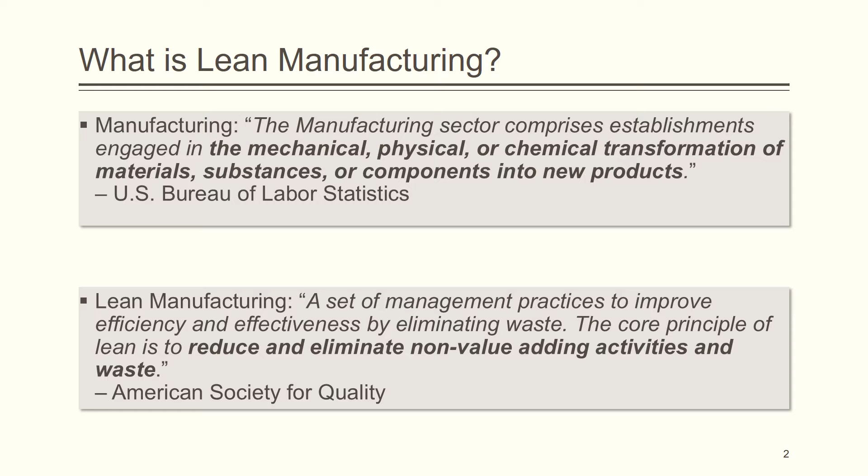You may sometimes hear lean manufacturing referred to as lean production, lean thinking, or lean management. They all describe a philosophy that emphasizes adding value to the customer and a commitment to continuous process improvement. Lean manufacturing is based on 5 core principles: value, the value stream, flow, pull, and perfection.

The first principle of lean is the identification of value. Value is determined from the perspective of the customer and includes how a product can meet a customer's needs, as well as the price and delivery time.

Next, the second principle is to identify the value stream. Value stream mapping is a process of visually documenting all of the activities involved in the production process which add value for the customer. Some processes do not directly add value, but are nonetheless necessary to support the value-adding activities and to run the business. Activities that are both non-value adding and unnecessary are considered waste and should be eliminated.

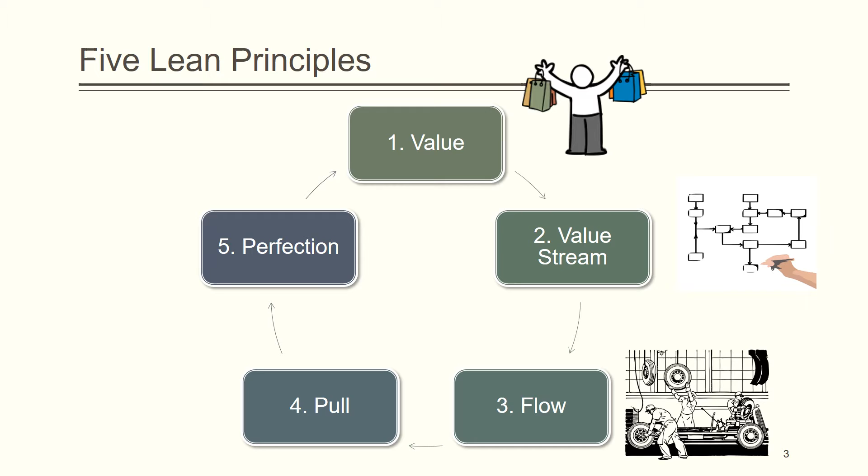Third, lean manufacturing emphasizes the uninterrupted flow of value-adding activities from raw materials to the end user. Improving flow involves connecting materials, processes, machines, employees, and information in a seamless and uninterrupted manner. Fourth, pull refers to relying upon customer demand to direct the quantity of units produced. Using a pull system involves minimizing the stock of raw materials, work in progress, and final inventory on hand.

Finally, lean manufacturing is focused on striving towards perfection through a process of continuous improvement. You may hear this referred to by the Japanese term kaizen.

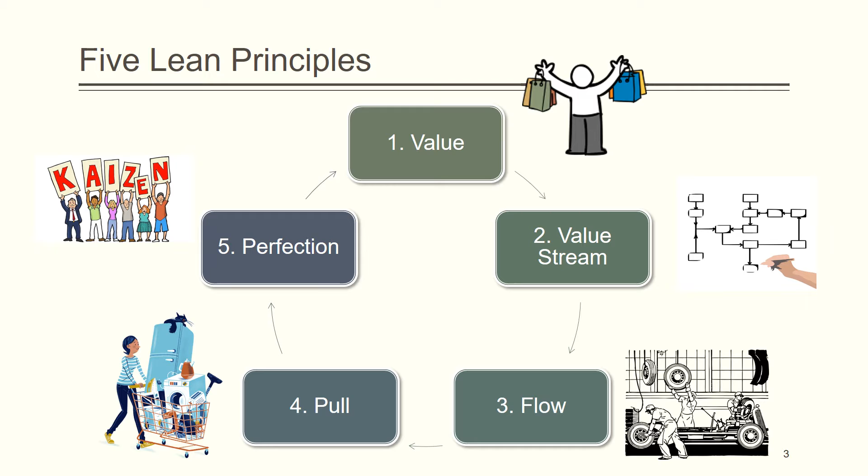Fundamental to the philosophy of lean manufacturing is the reduction of waste. Waste can be divided into 8 categories: product defects, overproduction, time spent waiting unproductively, non-utilized or underutilized talent, transportation of goods from one location to another, excess inventory, unnecessary motion of people, machines, and items, and extra processing steps, which are non-value adding. All of these types of waste add costs but do not add value, and therefore should be eliminated.

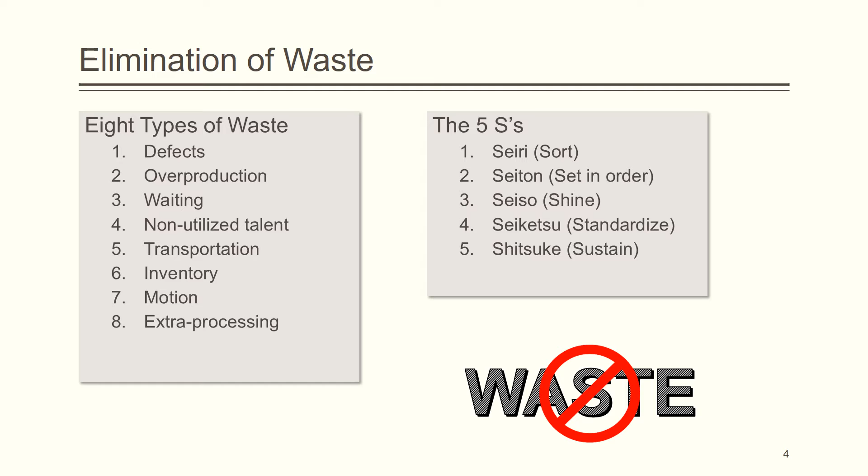One of the several tools in the lean practitioner's toolkit is the 5S system, which can help to reduce waste. The 5 S's are sort, which involves removing unnecessary items and clutter; set in order, or make sure all necessary items have a designated place; shine, or make sure the workspace is clean; standardize the process by regularly sorting, setting in order, and shining the workspace; and finally, sustaining and reinforcing these best practices by making the 5 S's a habit.

The most famous example of lean manufacturing is the Toyota production system. Toyota's goal is to achieve the best quality, lowest cost, shortest lead time, best safety, and highest employee morale by eliminating waste. The system is based on 2 principles: Jidoka and just-in-time.

Jidoka seeks to build quality into the product through several principles and processes, such as separating the human from the machine, preventing errors, and the andon system, which involves workers being able to stop the assembly line if they detect a problem. This ensures that defects do not propagate through the manufacturing process to the customer.

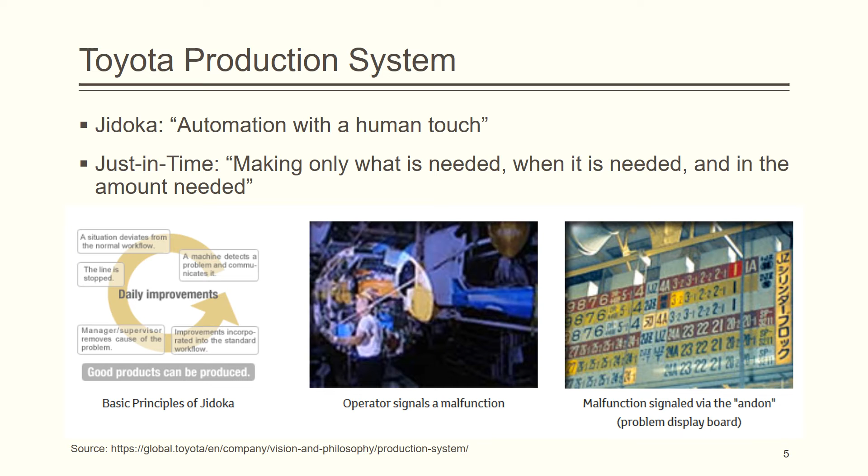Just-in-time seeks to make only what is needed, when it is needed, and in the amount needed by minimizing batch sizes, operating based on a customer pull system, and defining takt time, which is the processing time necessary to meet customer demand. A key element of just-in-time is Kanban, which is a system of visual signals, including cards and signboards, to indicate when inventory or parts need to be restocked to meet customer demand.

Can the principles of lean manufacturing be applied to service industries? The short answer is yes. Lean has been successfully implemented across a number of service industries. However, service processes and manufacturing processes differ in a number of important ways, and therefore, implementing a lean service enterprise is not as simple as copying everything over from the manufacturing world. Implementing lean principles in a service-oriented industry requires thinking carefully about customer value and mapping the value stream, as well as thinking about how employees contribute to the customer experience.

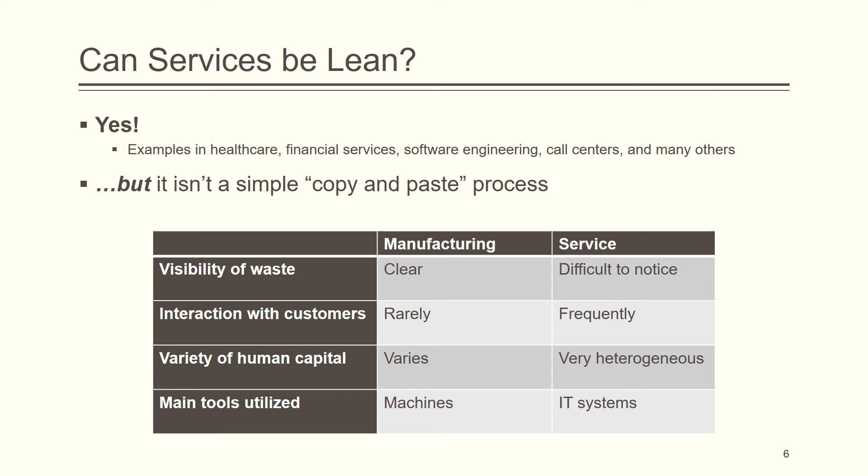So what are the pros and cons of lean manufacturing? Since lean is focused on eliminating waste, some of the pros include reduced costs, lead times, and materials used. Additionally, the focus on customer value can build strong customer relationships. Importantly, lean empowers frontline employees to scientifically solve problems which may arise by using the plan, do, check, act cycle.

However, there are some potential drawbacks as well. A just-in-time system with a focus on present customer demand and low levels of inventory can make the system vulnerable to equipment failures, labor shortages, and large fluctuations in demand. Additionally, it can be difficult to transition a traditional manufacturing process to a lean one, and it requires buy-in from employees and management.

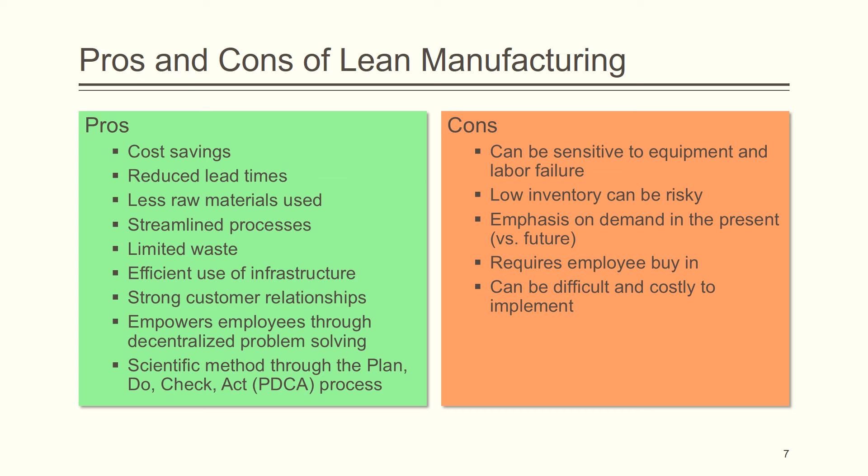You may have heard of other manufacturing philosophies, such as the theory of constraints and Six Sigma. How are these different than lean manufacturing? At a high level, lean is focused on reducing waste, while on the other hand, the theory of constraints is focused on identifying and managing system constraints, such as bottlenecks, while Six Sigma is focused on reducing variations.

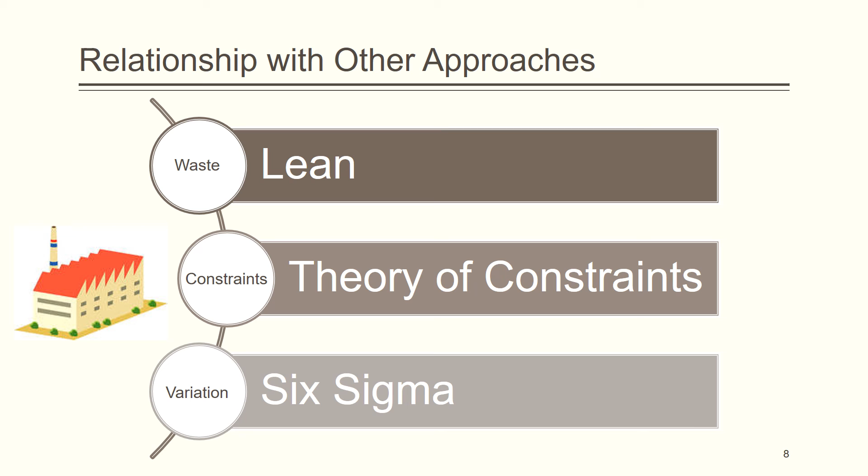While we don't have enough time to go into all of the nuances here, it is important to note that approaches can be used together, such as Lean Six Sigma, which focuses on eliminating both waste and variation. All of these processes have the goal of increasing quality, but involve different methods and tools as a consequence of how they frame the problem.

As a summary, lean manufacturing is a powerful approach for delivering customer value by increasing quality and reducing waste. We have just scratched the surface of the topic here.

If you're interested in learning more, there are several resources that you can investigate about lean manufacturing. Several professional associations exist which provide training and tutorials, such as the American Society for Quality, the Lean Enterprise Institute, the Society of Manufacturing Engineers, and the Association for Manufacturing Excellence. Additionally, there have been a number of books published on lean if you are interested in diving deeper into the topic.